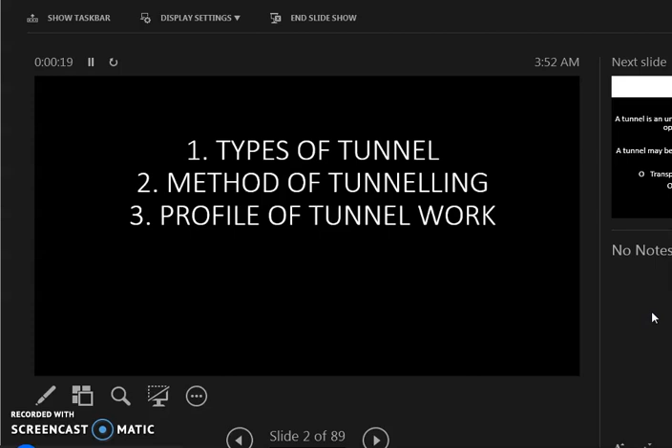Today we will continue our lecture, which is entitled tunnel construction. So in this topic we will review the types of tunnel, the methods, and also some profiles of tunneling work. So what is a tunnel?

A tunnel is an underground passageway, and it is enclosed except for openings for access, commonly at each end. Usually we need tunnels for traffic, canals, hydroelectric stations, and they are very beneficial for transportation, for conveyance of material, for disposal of waste, and also for military defense.

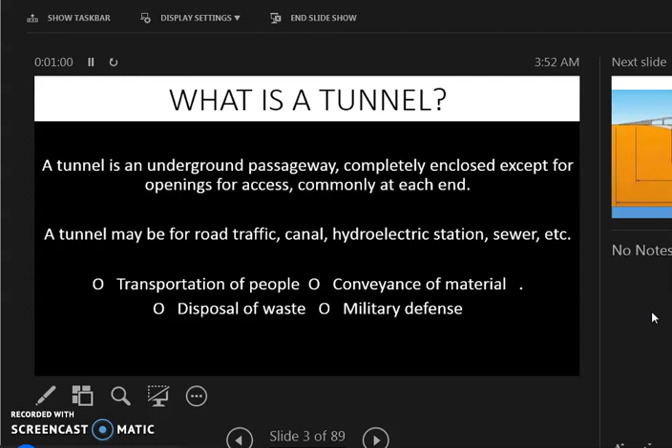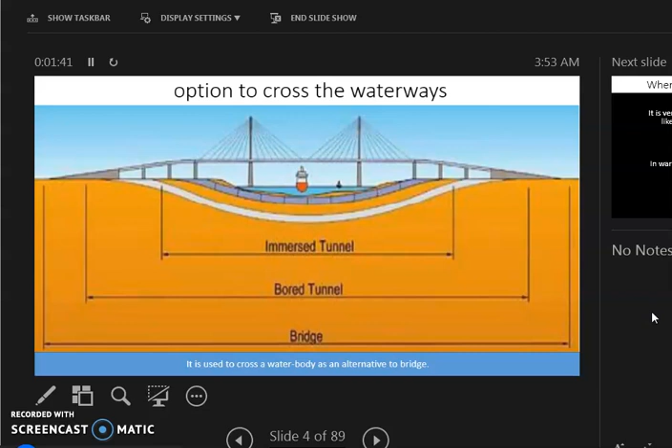So I give you some options to cross the waterways: immersed tunnel, bored tunnel, and also bridge. Usually we use a bridge when there is no constraint about the land or the cost. But if we have some constraint about the space, about the land, a tunnel is a much better option to cross the waterways.

It is very useful where a bridge fails to fulfill requirements, like in the sea, in urban areas, and in mountains. So we don't need to prepare a bridge, we just need to prepare a tunnel. It is much more efficient, and in wartime it is much more difficult to destroy a tunnel, but to destroy a bridge is too easy.

So that's why, as a precaution in military defense, we need tunnels compared to bridges. And a tunnel saves lots of land and time.

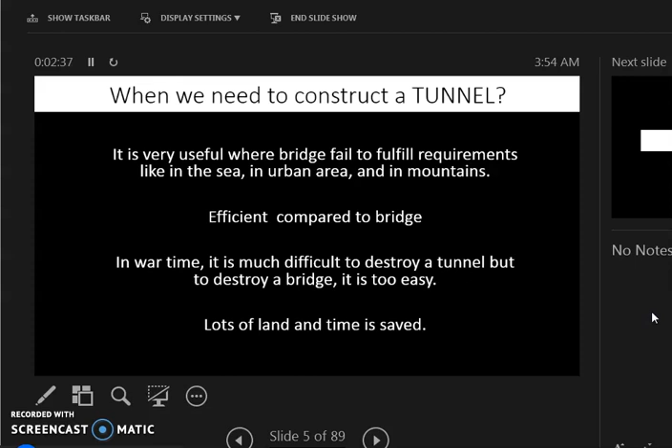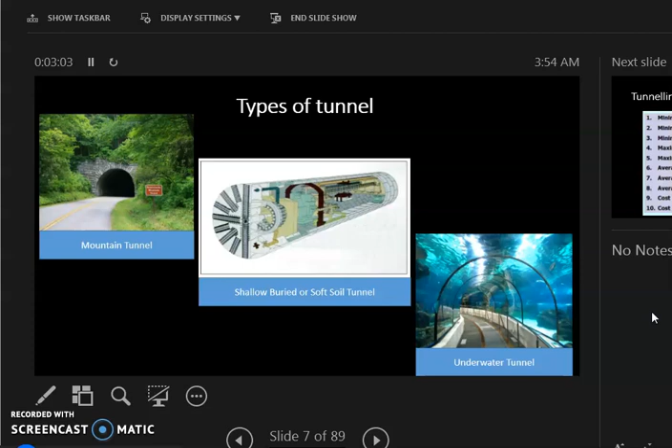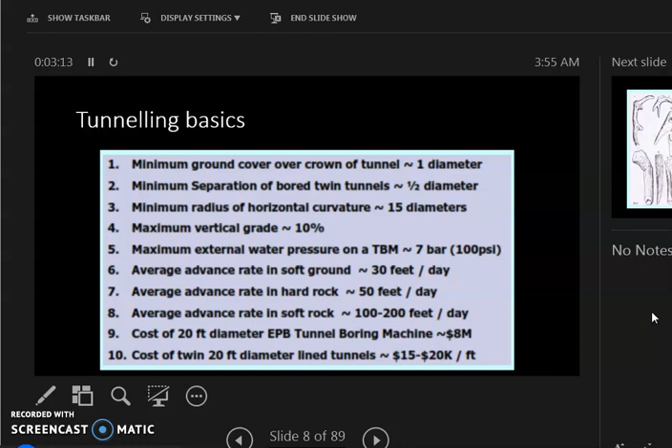Types of tunnel. I differentiate the types of tunnel into three. First is the mountain tunnel, then the TBM, tunnel boring machine, which is a shallow buried or soft soil tunnel, and the third one is the underwater tunnel. So this is the tunneling basics. It is a rule of thumb; there is no single design element to fulfill all of this.

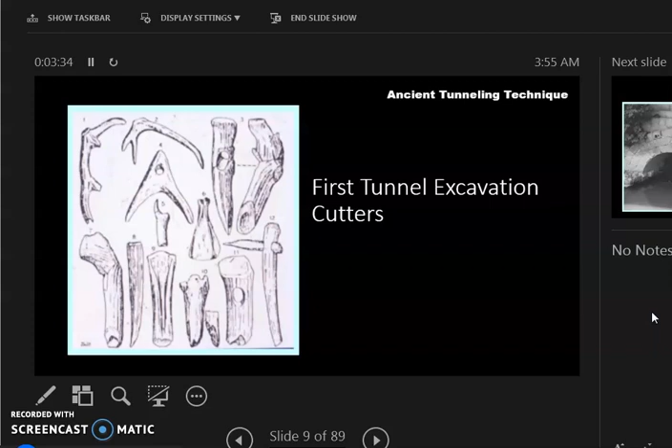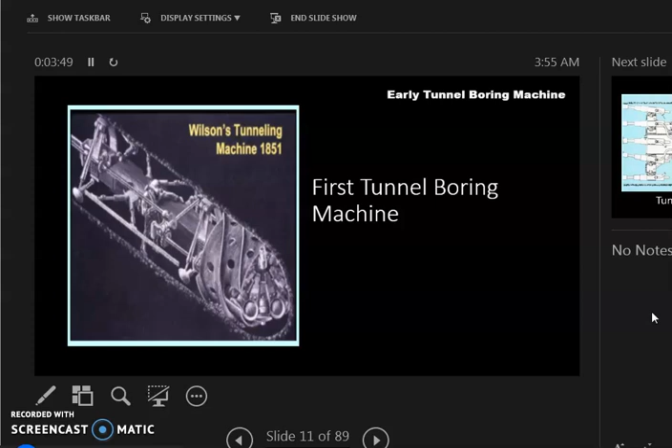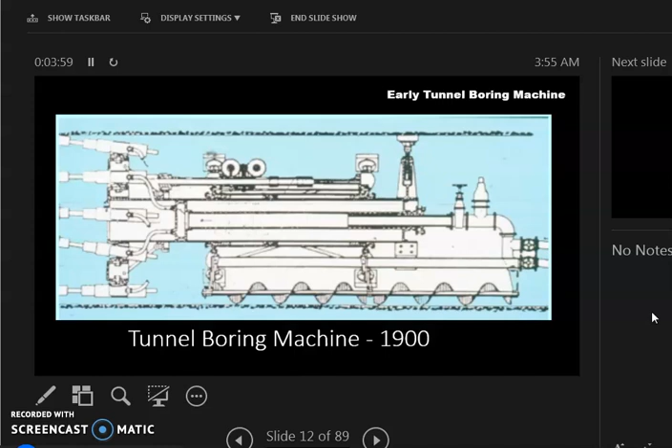So these are the three basic types of modern tunnel construction. We have the cut and cover tunnel, which is constructed in a shallow trench and then covered over. Usually we need to develop a tunnel in just a shallow trench, maybe for a parking space or an underground shopping complex.

We have the bored tunnel, which is constructed in situ without removing the ground above, so we use the tunnel boring machine. And the third choice is the immersed tube tunnel, which is sunk into a body of water and laid on or buried just under its bed.

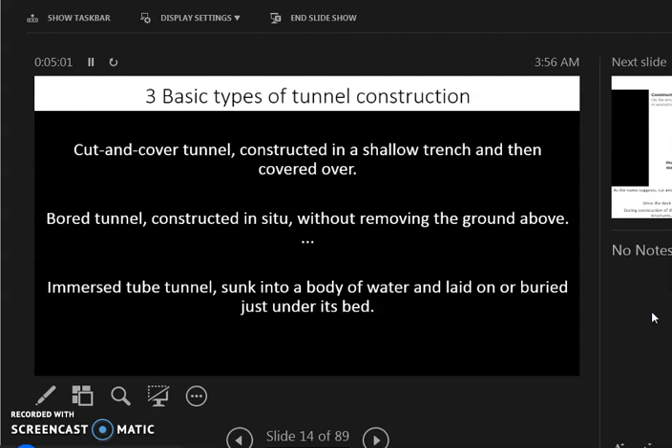So this is the cut and cover method. This is the construction site; we need to do the construction in this area. This is the diverted road. And this is the proposed station box that we need to develop, whether it is a parking space or an underground shopping area.

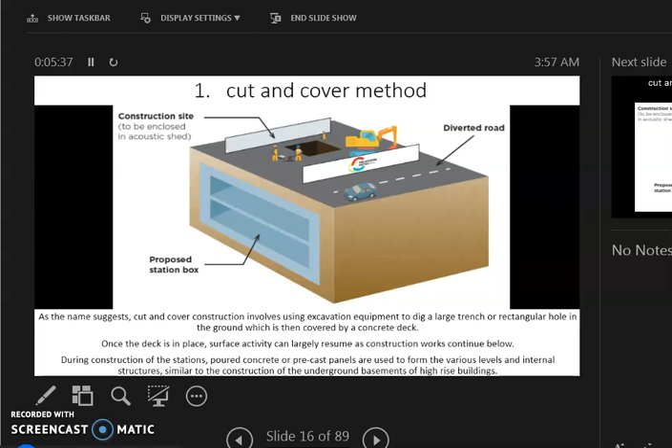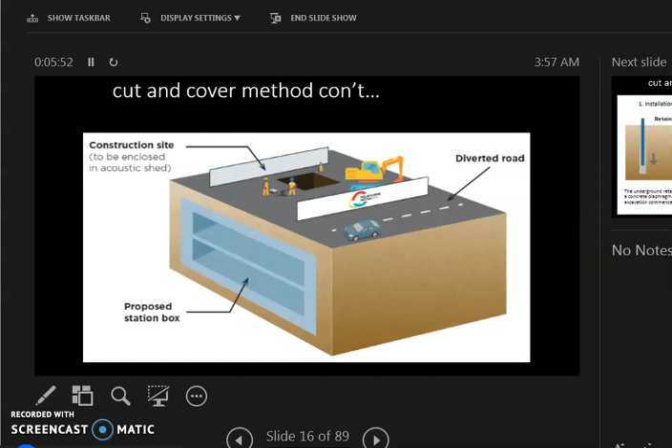So this is the procedure, how we develop the proposed station box under the ground. First, installation of the retaining wall, and this is the proposed station box. Second is the excavation and installation of steel struts. This is like the foundation of the structure, and this is the roof slab to be constructed.

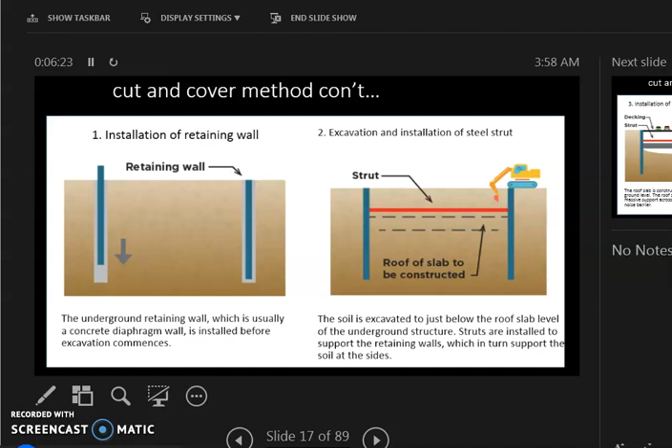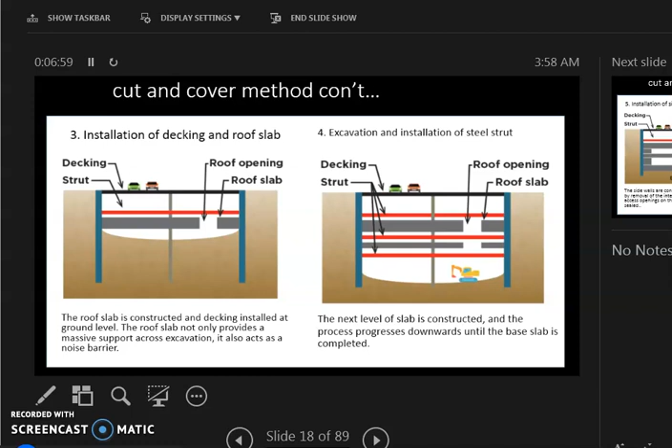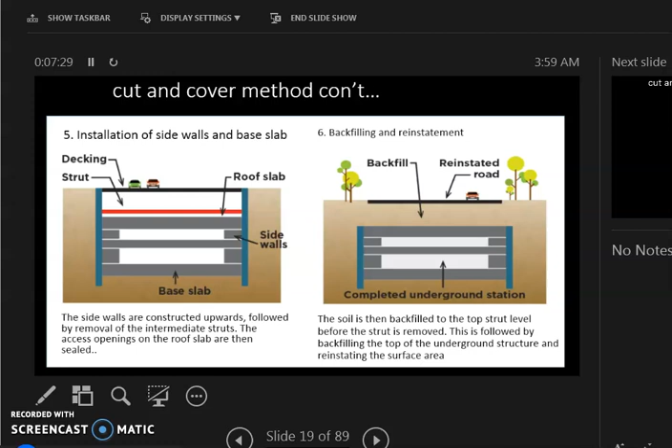After it's complete, we need to install the side wall and base slab. And finally, after all work is done, we do the backfilling and reinstatement. We backfill the soil so that above the ground, activity is conducted as a daily routine.